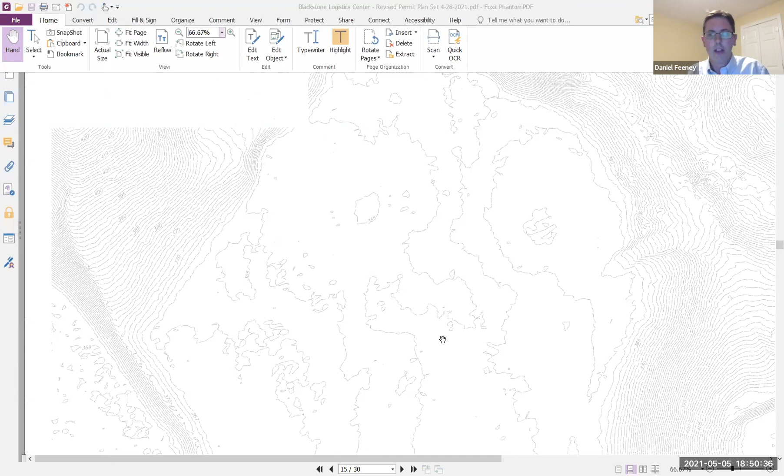I'll call up a plan that windows in on that area. So up in this northern parking area, we looked at what the groundwater elevations are and what we could get into catch basins and into an infiltration system and still be the required 2 feet above seasonal high groundwater at the bottom of these chambers. So 2 catch basins will get collected and discharged into the infiltration system.

We have a lot of infiltration proposed for the project, at the down gradient side. In meeting with Alan from Ecotech, as well as Jeff Walsh from Graves Engineering, they had requested a little bit more in the upper sections of the project. We were all in agreement that the groundwater flow actually flows down towards Lackey Pond on the other side of Lackey Dam Road, so the groundwater doesn't flow to these wetlands, but just in order to provide more recharge in the upper reaches, we were providing this recharge up here.

We had reissued the plans and some supporting documentation, as well as the response letter back last Wednesday, I believe April 28th. One other comment that Graves had made in their letter was just noting that when the DEP opened the file number, they had commented about this leaching catch basin, saying that if impervious area was getting there, it would need to be treated before infiltration.

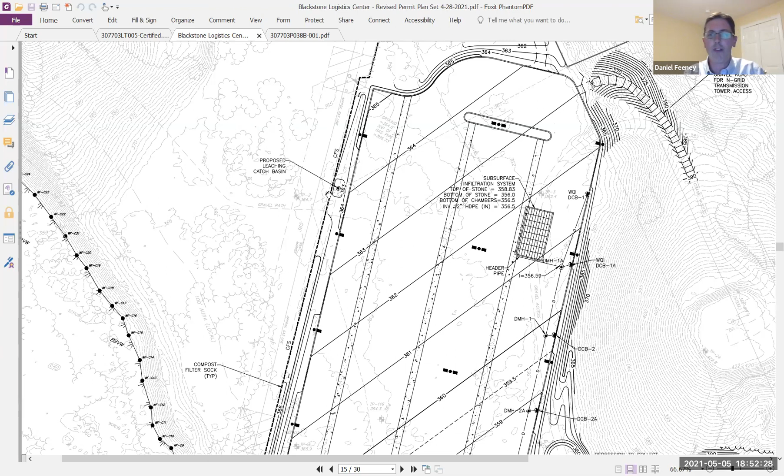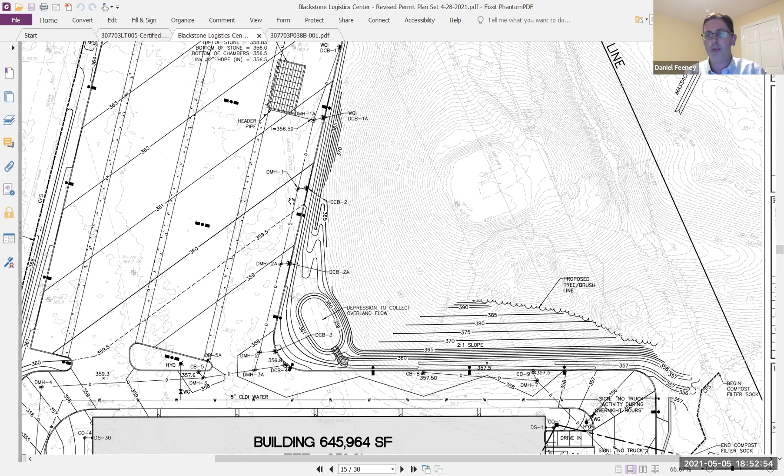We also put in another low point down here to provide some additional infiltration. From the National Grid easement, there's a high point that runs along it, so there's a fair amount of water that runs down the hill. We have pervious soils out here, but because it's so steep, a lot of that would probably reach the pavement during a steady rainfall event. So we added a low point down at this point, again to promote some infiltration from the site.

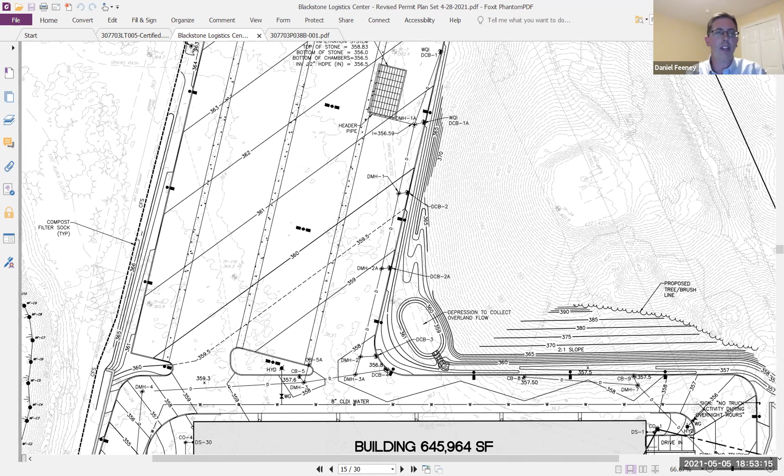We just responded regarding the leaching catch basin that's been proposed up here since the start of the project. We also, at the request of Ecotech, added in the 25, 50, and 100-foot buffer zones, since different towns have different regulatory buffer zones. So just to be consistent, all the buffers are shown throughout the site for all 3 towns. To recap, the work within Sutton is generally in the outer section of the buffer zone.

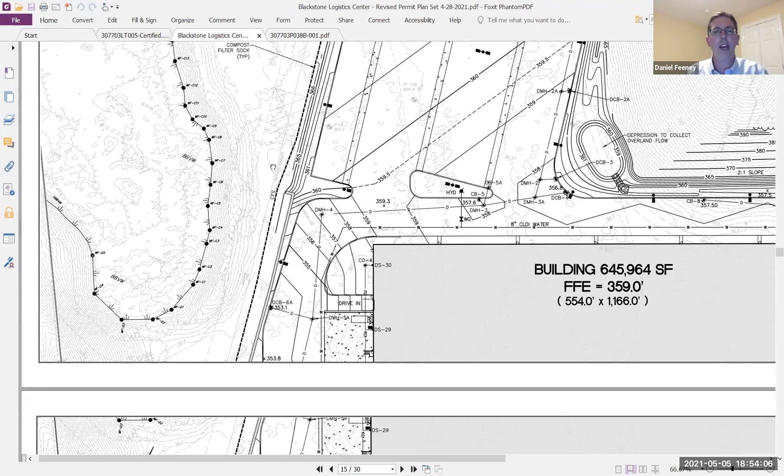The pavement touches in a couple of slight locations into the 100-foot buffer. If you're looking at the CD set of wetlands, the 100-foot buffer zone does come just into this edge of pavement. And then further down at the B set of wetlands, the buffer zone does just touch where the curb line's going in, and there's a little bit of grading associated with that.

Most of the work is in the outer buffer within the town of Sutton. So that's the update. We did meet with Uxbridge Conservation Commission on Monday of this week. They are basically all set with the project. We have asked them to continue it, not close the hearing, just in case Sutton or Douglas Conservation Commissions have comments that change the project, or if through the planning board process there are any changes.

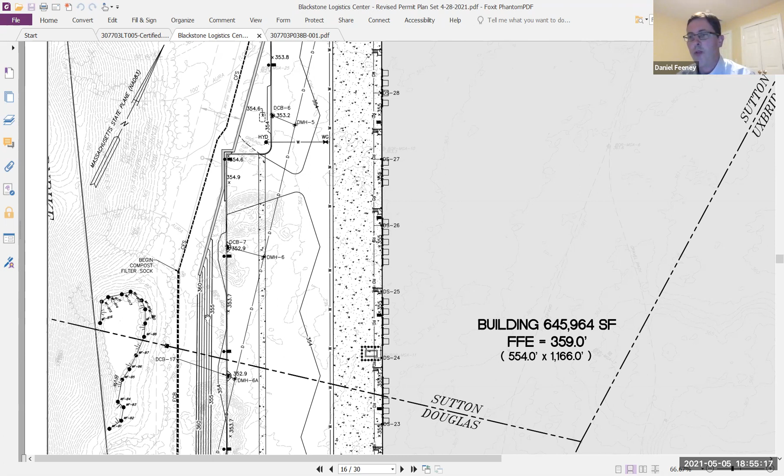We have been meeting with the planning board jointly. We are now set to meet individually with each planning board. Most of the remaining discussion items with the planning board deal with traffic, so some offsite traffic issues. But again, rather than have you guys closing the hearings and then needing to amend orders or reopen closed hearings, we've just been asking to continue.

That's basically an overview of where we stand. And thank you very much.

So you basically kind of answered one of my questions. Did you want us to close this out tonight? My feeling is this is, in my opinion, pretty straightforward for us, but one of the three towns is going to have to go first. So would you like us to go first with the board approval, or do you want us to continue this?

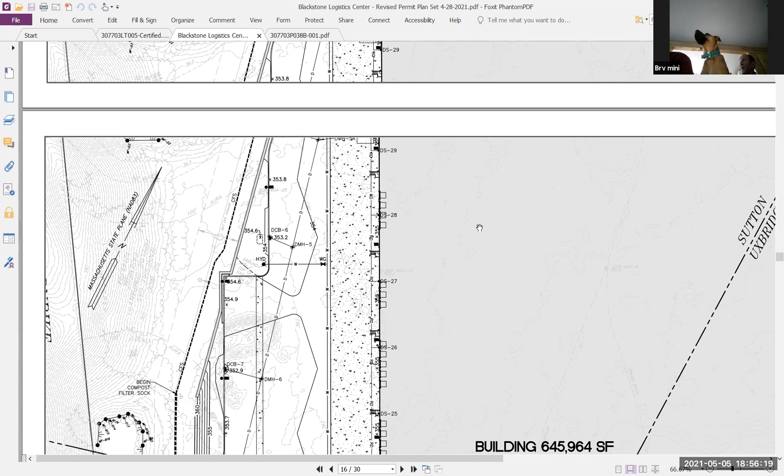I think if you can continue it, do you guys meet in two weeks? We meet again on May, what date is it, Wanda? Like the 23rd or something, maybe? May 19th, I was way off, May 19th. Yeah, I'm happy to answer any technical questions tonight, and then if you continue it to May 19th, hopefully we'll have a final sign off from Ecotech at that point, hopefully Graves Engineering, on all stormwater or commission related items gives us a final sign off, and then I think at that point we'll probably proceed.

Does anyone from the board have any questions? All right, Bill, can you hear me again? Yes, Zach. Okay, I just have one general question. If we could go to the picture of the full plan, the 307. Just one general question, and I know most of this is outside the 100-foot - where are you planning on putting all of the snow? Because I saw that in one of the documents I was reading about the snow disposal.

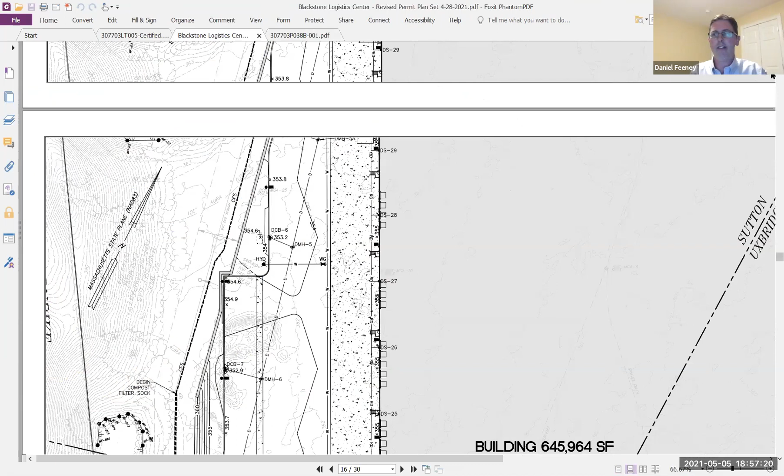Yeah, so in general, we've identified areas at the edge of the pavement, but there's a larger area back up in here. We've identified this area, and if we look at it in a little bit closer detail, you'll see it on the plans. We've identified this as a snow storage area up here, staying outside the 100-foot buffer. Okay, thank you.

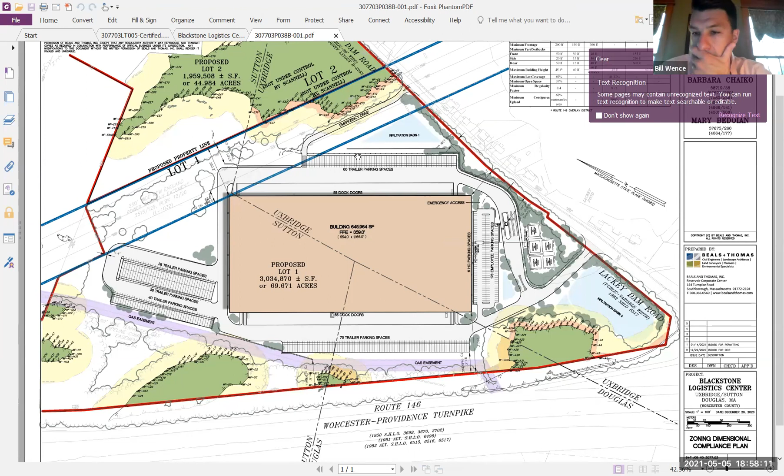If there are no further questions, I guess I'll make a motion to continue, if that's acceptable. Yeah, sorry, I'm having technical difficulties, I'm muting now. Wanda, what time would it be on May 19th? It will be at 6:40, same time as tonight. Okay, all right, I make a motion to continue 2R, 30R Oakhurst Road and 13 Lackey Dam Road to May 19th.

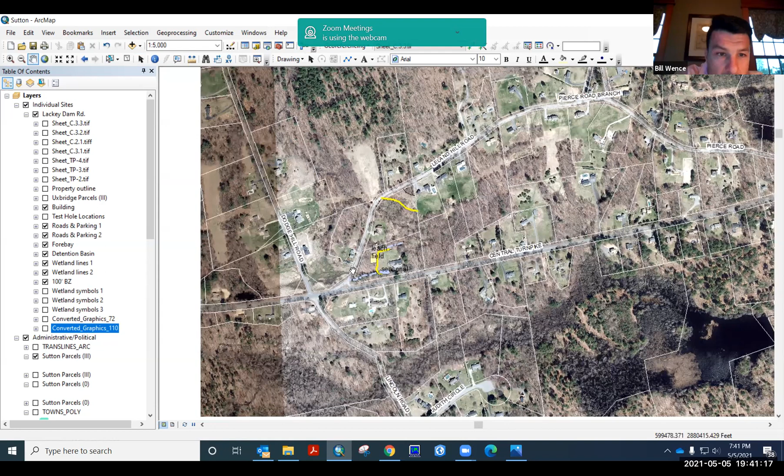That would be at the end of Dodge Hill Road before 159, the house that John Goslin built. Right there with your hand, yep. The pipe that goes from the field on the left to the field on the right is basically there. I believe it to be collapsed. In fact, there's a hole in the top of the ground now. It looks like it's starting to become a sinkhole.

And the water is really not draining. As you can see, it's a fairly new picture because that house is there, but the water is not draining at all. I believe it might even be getting blocked over on Leland Hill as well. Both those pipes are probably older than all of us put together.

Yeah, we've actually investigated this one here as well. So the water comes through here too, and that one's still coming through a little bit. I took a walk over there over the weekend, but the other one on Dodge Hill, it's just so easy for me to walk through. It's coming through, but when there were days of pouring rain, it's still just trickling. So it's either blocked or it's collapsed, or both.

Mr. Chairman, as part of the construction of this house, which was done through a notice of intent, the commission gave the owner the ability to keep mowing this wet meadow, which was a cow pasture at one time — the old barn was right here. So in order to keep the wet meadow active, there's an in-perpetuity condition in that order of conditions that allows the owners of this house to cut this, like they hay it a couple of times a year, which helps this area. You can see the right of way for the road definitely flares out right here, but historically this entire area has been maintained by the owner of this house.

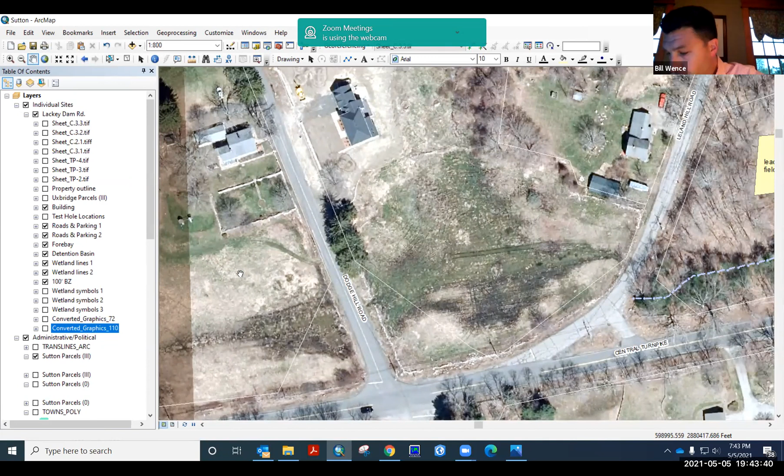Coming in here to clean it out, I would consider that part of the in-perpetuity condition with that permit. So I'm hoping Matt can get his guys out there to look at it, maybe they can snake a pipe through or chase through it. But I wanted to bring that up. Any other unexpected business or anything else?

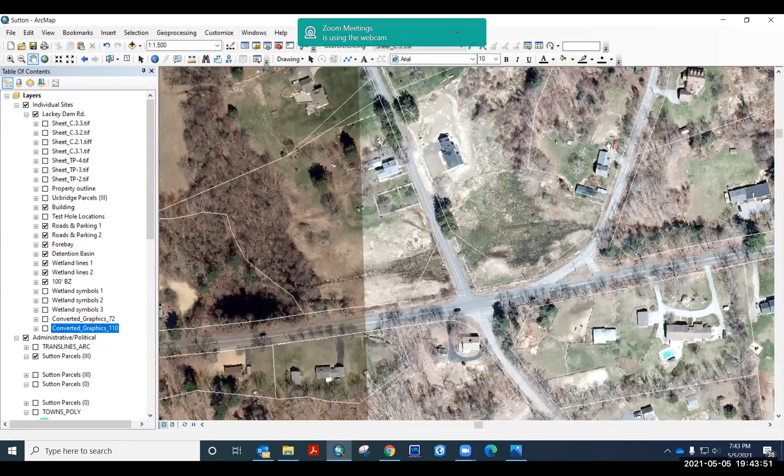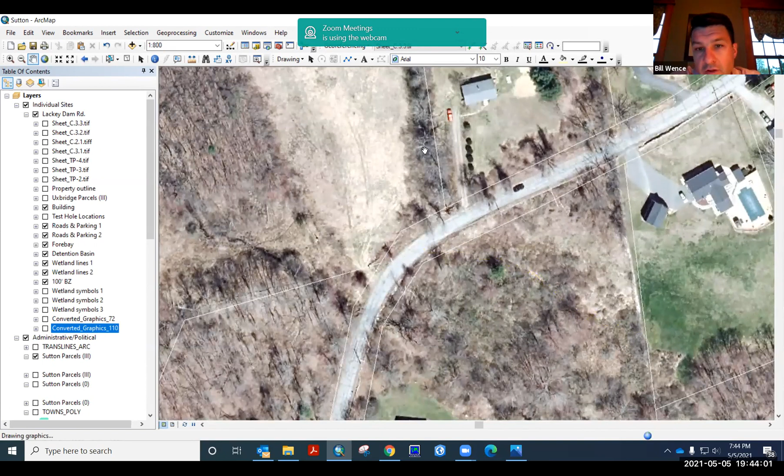Tonight there was 189 Leland Hill Road about that clear cutting. Oh that's right, it was seen. Brandon, right where your cursor is, if you go right, that whole area has now been cut pretty much from the yellow to the triangle where the black line is. Everything's cut in there. I put in this yellow line to help, because it looks like the wood line is right about where the yellow line is. And there's another black line here I didn't get a chance to finish, but that looks like the northern end of the historically cleared area.

So the gas line comes right through here. I was originally thinking that might have been part of their annual maintenance, but Chairman Bill was saying that it comes right up into this corner. Which could, yes it does. Maybe that's still their right of way. And if it is, it was brought to my attention. I went over and there's no doubt you can see it, especially if you come back down Leland Hill, it's even more obvious. So that's why I wanted to share it.

I believe Wanda was sending a letter to the homeowner just to question. I recall a couple weeks ago Mrs. Urbanowski spoke to me and said the gas line does go through the back of her property and they're always doing something. So maybe it could have been that they're doing that. But I can send a letter out to the homeowner at, what was he, 161 I believe it is.

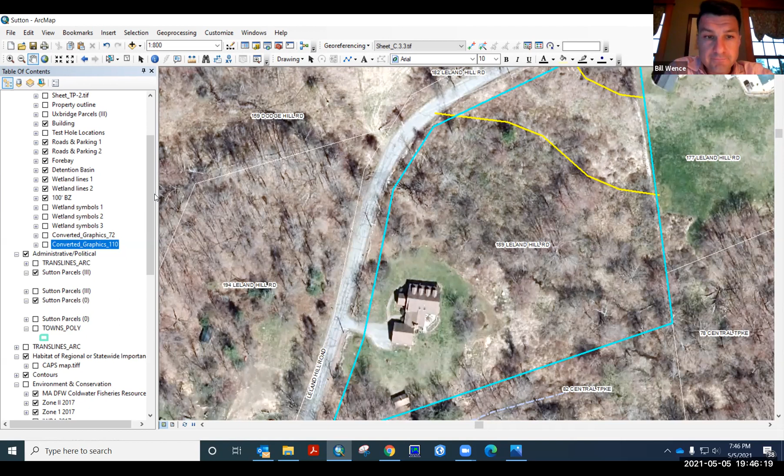Maybe it's just the pipeline. That's what I'm thinking too. Anything else from the board? Don't think so.

We got a lot of projects going in town. Are we all caught up to date on site visits? Or does anything need to be done? Wanda, has anyone called for anything? No, the only one I had was the 91 Dodge Hill that I put the wrong address in - that's where the people who owned it live, at the 139. Okay, so other than that, I think we're done with that. Anything else for anybody tonight?

Or we good? Mr. Chairman, we have 11 Tucker Lane and some cutting and clearing and fill that was brought in to bring up to the board. I issued a verbal cease and desist on Monday and a written cease and desist, signed by yourself Mr. Chairman, today to Mr. Ziccarella. What address was that? 11 Tucker Lane. Okay, sorry, I didn't see it on the agenda, so I would have missed it. Thanks, Brandon. Yeah, this is a situation that has to be brought up right now.

So let me really quickly bring it up on the map and also bring up some pictures. Let me bring up the pictures first. This one goes back to 2019. The house has a tight tank, a notice of intent was filed and an order of conditions permit issued in 2019. The work was done pretty quickly and a certificate of compliance was issued also in 2019. So it's actually pretty cut and dry because the commission has a prior plan on this.

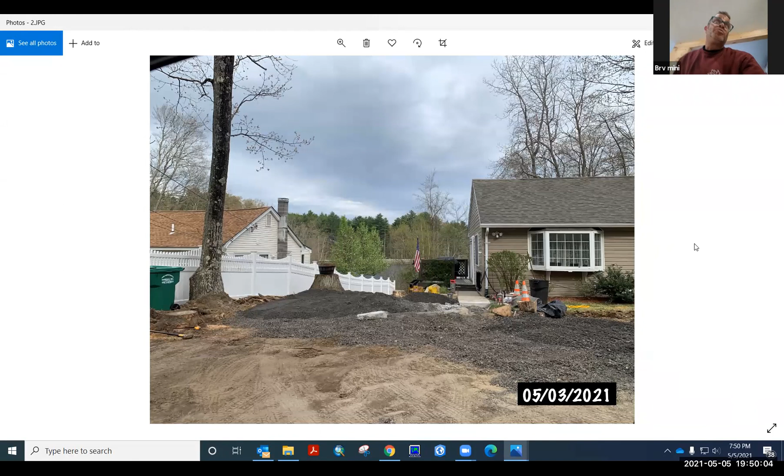I was hired to plant the lawn in the backyard, and I moved some loam from the front yard to the backyard, spread it and raked it, and basically that's what I've done. I didn't do any cutting of trees or anything like that; they were done a long time before I got here. I put up silt fence like I was asked. I was just wondering if you guys would let me plant the new lawn back there. I didn't know I was supposed to get a permit.

Can you shut that off? Thank you.

Brandon, was this area already disturbed? No, you see this picture right here? This area back here was part of the back lawn, but the back lawn wasn't particularly big. You can see right here where the cursor is, that's a little bush, and it's got some mulch underneath it. But I'd say somewhere around where the date is, that was about the back end of the yard. The rest of it, there was a buffer of lawn maple trees between the lawn and the open water of Tucker Pond.

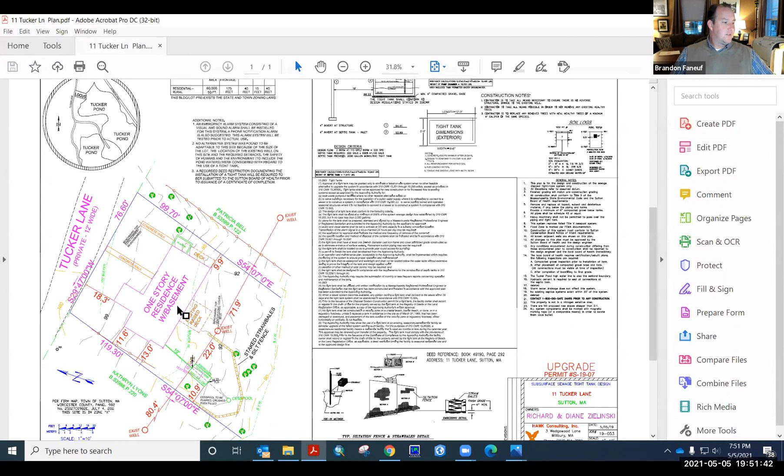I think one of the things I could do here as well is show the approved plan. So here we go. Everybody see that? So this is the plan that was approved in 2019 when the Zielinskis purchased the property.

The Title V inspection was done, and the verdict was that the septic system had to be upgraded. But because of the tight nature of everything on this property, the solution was a tight tank. A tight tank is basically just a glorified septic tank that has to be pumped out. There's no leach field, so there's no infiltration of septic effluent on site. It all has to be pumped out.

So it's a really tight situation because of the lack of area to put a leach field, and the distance to the BVW and the water and whatever else the Board of Health required. So the tight tank is off the southwest corner of the house. You can see here, 19 feet off the corner of the house right over here. The limited disturbance is right here with the wattles. It didn't mean that this area was allowed to be completely clear cut, but they obviously needed enough room to be able to work and put in the tight tank.

Here's the old cesspool, which was so close to the BVW and the water that obviously that was a bad idea, and the current situation is a major improvement. But as you can see, this is the only area that was approved to be worked in, while what I saw was a clearing of this area right in here, just to the east, above the area of approved disturbance. Then it goes all the way down to the water in here. So there was no permit to do anything in here.

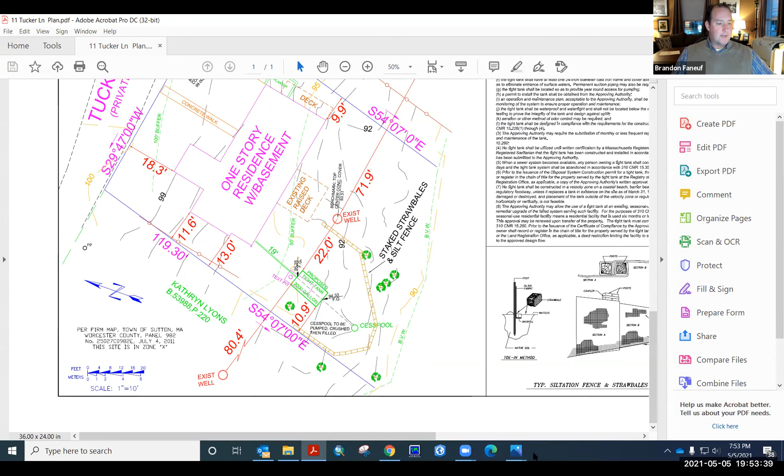So to go back to the pictures, the clearing goes all the way into the water. There's material deposited in the water, and this material, like Mr. Menasian just said, was transferred from one part of the property to the other. He attests that there was no fill imported from other areas, it's just a moving around of materials on site. Nevertheless, that's still fill material either in the BVW and on the bank of the pond, and the land underwater, under the pond, and in the buffer zone of it all. That's unauthorized.

So the current order from '19, is that still open, Brandon? No, that was closed out in 2019. So it's a fresh start, it'd be a whole new filing. Okay, it would be a whole new filing.

Here's the thing: I have a feeling that some BVW was filled in, and if you were to allow it to remain, they would have to replicate it somewhere on site at a ratio of at least 1-to-1, that of what was filled in will be replicated. There's not a whole heck of a lot of room here on site to do that. And then there's the disturbance to the bank, and there are thresholds for disturbance to the bank, which is 50 linear feet or 10% of the total frontage of the lake on the property. Just me giving it some ocular estimation in the field says that they went over their 10%, which would require a wildlife habitat evaluation by a certified wetlands, certified wildlife biologist. So there's a lot involved here with permitting.